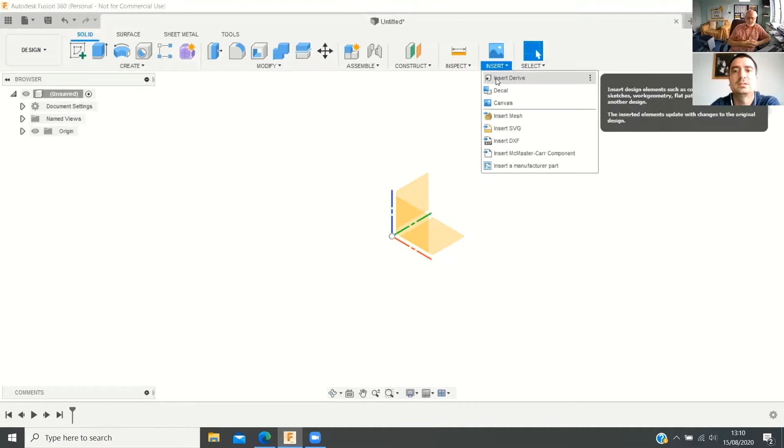Okay, so starting the importing the background image into Fusion. What I'm going to do is come up to the top, go Insert, then Canvas, and insert the canvas from my computer by going into the correct folder and finding the background image that we're going to use.

We're using the plan for the TML boxes. I'm going to insert that onto this first plane here, and as you can see, it's already imported the file there. So then once it's imported, I can go to Canvas over on the side here, edit the canvas, and then calibrate it.

Now, what that enables me to do is to change the size to the correct scale. I'm going to rotate this round. The best thing to do is to take two known dimensions, and then you can just select those points, and that will give you the correct size.

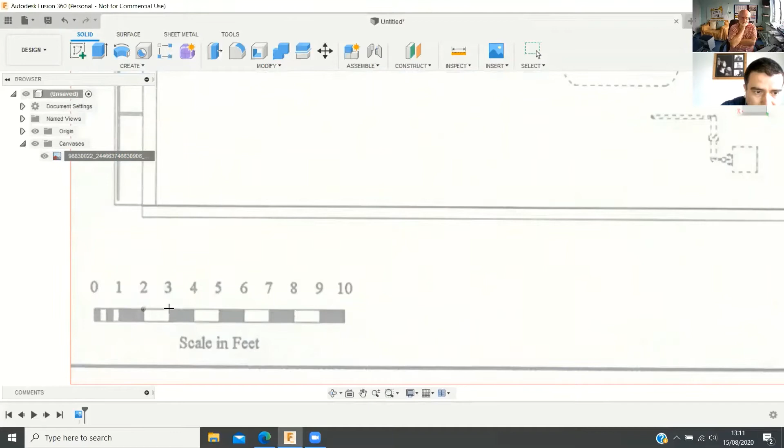So you go to right click over on the image, calibrate. Now on this one it's really good because we've got the scale in feet. So if I just select 2 points that are within the foot dimension and then tell it that should be 2 millimeters, that puts the image file to the correct size for N gauge.

Obviously, if you're doing OO, you do 4 mil. That's now set as an N gauge. You can also do things with right clicking and doing this.

Edit canvas. You can rotate the image slightly if you need to, so you can get it at the correct angle. You can also, using these arrows, move the image around so you've got it at the correct position where you want it. Once you've done the first side, just click OK, zoom back out with the rotation tool.

Then I'll insert the second canvas, which is the same image, but what I'm going to need it for is the end-on view. Selecting the side plane this time.

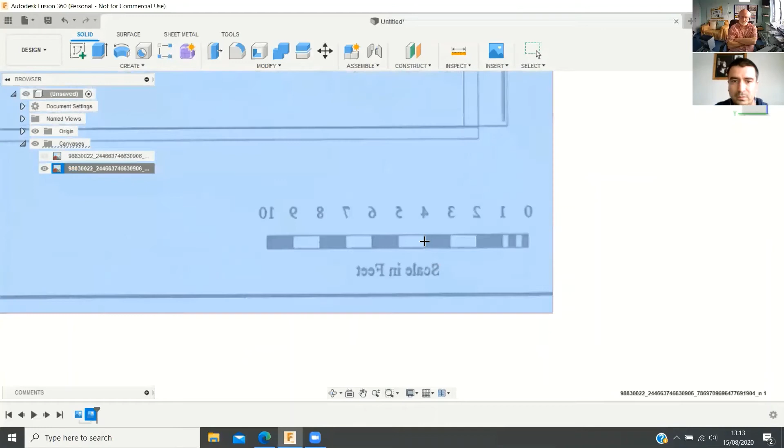I can hide the image that I don't need using the little eyeball key here. Zoom in on that image, do the same again, calibrate, taking 2 known points, telling it it's 2 millimeters, and again that's now set to the correct size.

So over here in the canvas, you can see where the mouse is, there's like a little eye button. If you click on that, you can make them visible or invisible. You can do the same when we start to draw the actual wagon itself.

Okay, so I'm going to start on that plane there. Come round so I'm side on.

So the first thing I'm going to do is, within the printer itself, when you print anything, it's got to be supported to the print build plate. Unfortunately, when you do that, you end up with all these little marks on the surface where the supports connect to the surface. So to get around that, you either want to print with all those supports on the bottom where they're not going to be seen, or on a surface where they can easily be filed off.

Also, when you're printing hoppers, because we're printing with a resin, it's got a liquid in there, you end up with a typical glass upside down and water situation, you get a vacuum. So you can't really print too well with a hopper without getting lines on it.

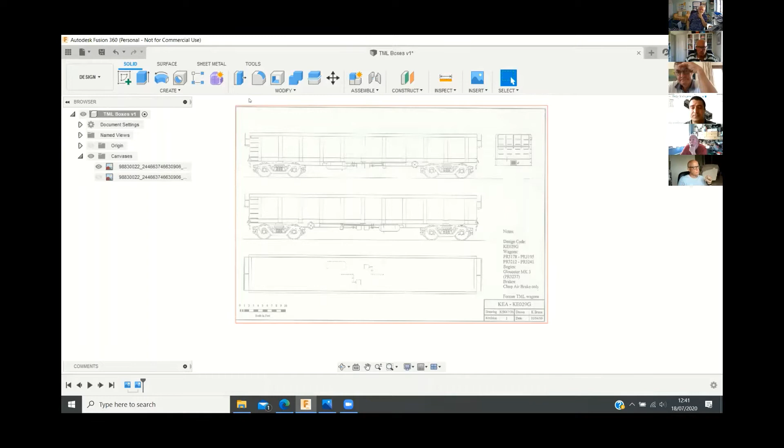So the best thing I can do with the hopper when I print it is to actually print it in 2 parts. The top part is going to go obviously from the top down to this line here, and then the bottom part will be there downwards.

That then gives me a flat surface that I can turn upside down and then file flat once I've printed it, for the supports on both internal sides, so they won't be seen once it's finished.

Okay, so what I'm going to do then is create a new component which will then become the top half of the body, and then I can rename it.

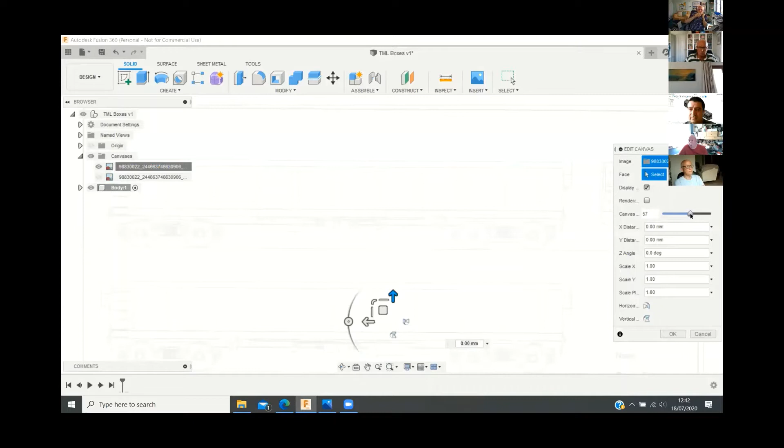As body. You can still just about see the canvas, but because I'm now working on a different component, that becomes a little bit more transparent and a bit more difficult to see. Hope you can all see it okay. What I can do is edit the canvas, and then on the side over here I can just increase the opacity slightly, which might make it a little bit more visible for you.

It's clear enough for me that I can see it. Okay, so the first thing I'm going to do then is start to draw the body.

So if I come up the top here, create a sketch. When I do that, I'll then go into the sketching process, and once the computer catches up, select the surface, which is going to be the same surface I'm looking at. At the bottom here, this is called the timeline, and everything I do will add something into the timeline. So that's my sketch that I've opened at the bottom.

Going back to the top, I'm going to select to draw a box first of all, a normal 2-point rectangle. I'm going to zoom right in, get it into the corner, so I've now got the box starting in the top corner. Let's zoom out, across the other side of the wagon. I'm using my roller ball on the mouse to move in and out, and then going down again to the bottom corner there.

So you can see now the outline is blue. When it's blue, what that means is it's undefined. Whenever you do a drawing, you want it to be defined so that any changes you make are editable later on within the software. If you leave it undefined, what you can end up finding...

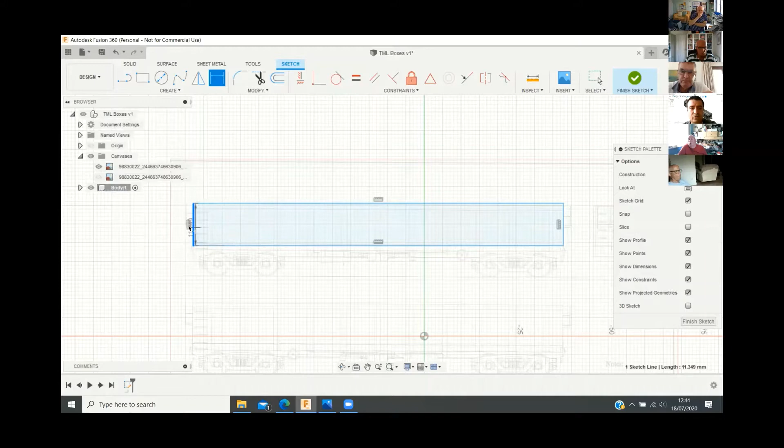So to turn this from an undefined box with blue outlines to a defined box, I'm going to use a hotkey, D on my keyboard. What that allows me to do is dimensionize it. So now I can give it a dimension. I'm not going to change the dimensions because it's obviously working to the drawing.

Okay, I've come out of the sketch, and now I'm going to extrude it, which allows me to turn this 2D image into a 3D box.

So all I'm going to do is create a small box to start with, give it a 9. I don't really mind what size it is at the moment, because what I now need to do is take the canvas and move it so that box is in line with the end-on view.

So I'm going to edit the canvas, and then these controls in the middle here allow me to move that canvas around. I've got left and right, and then I can angle it if I need to. So it's going to move it across.

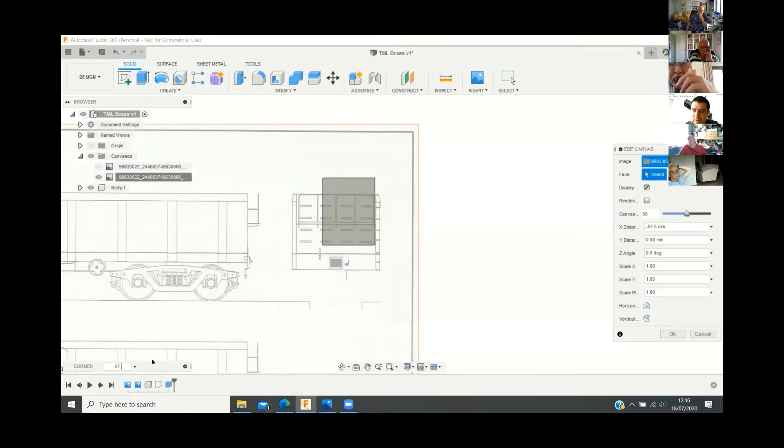Takes a little bit of fiddling to get it where you want it. Okay, so that's side to side, it's probably there or thereabouts. And then up slightly. Okay, so I would say that looks pretty much where I want it to be.

So I'm going to go back to the body, back into the timeline down to the extrude, edit that again, and then I can drag that to the exact width I want. As you can see, it's jumping across in 1mm sections, so all I'm going to do is go into here and use my keyboard to redefine that, to get to exactly where I want it to be.

Okay, so that box now is the exact size of what the hopper will be in the end.

Rather than drawing the whole hopper completely, what I'm now going to do, because the wagon is pretty much symmetrical, is split this into 4, because there's no point drawing it 4 times. I can just split it into 4 and then mirror all the elements across to save myself a lot of work. So to do that, I'm going to go up to this construction part up here and do an offset plane.

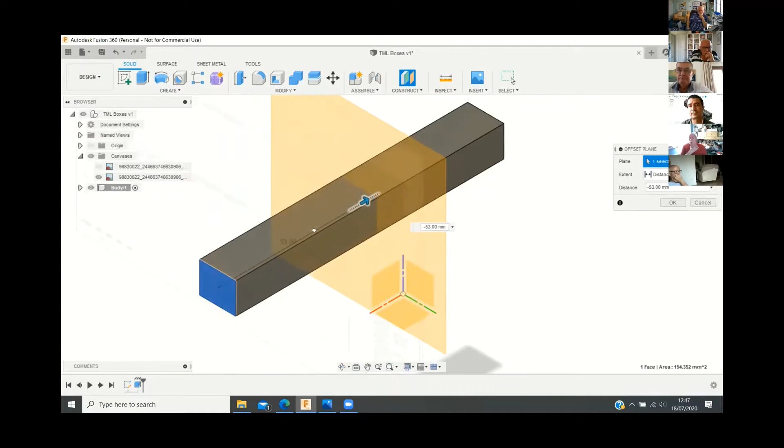What that allows me to do is select the plane, so the planes are the sides. I'm going to select the end one. It gives me this plane here, and then I can move that wherever I want it. What I should have done first of all is taken the measurement: 100.699.

.34. Back to that. Minus 50.34.

So that plane there will now allow me to use this split body function. If I open that up, on the side here I've got body to split, so I'm working on the box there, and the splitting tool is the plane. When I click OK, what it's done - I come down to body over here, this has now created 2 bodies for me. I'm going to get rid of that one, and then hide that construction plane because I'm not going to need that again.

The next thing I'm going to do is measure that 13.36, 6.8. Create a construction plane from that side, and then again split that body using that plane, hide the plane. So going back to there, if I bring that drawing back.

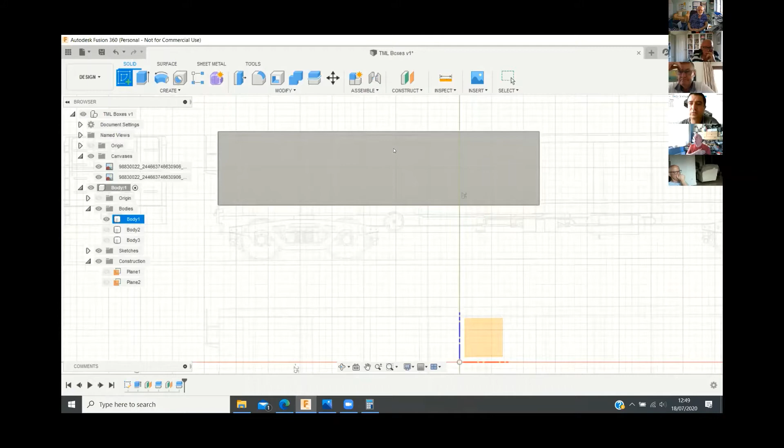Okay, so we've got the drawing to work to now. So what I'm going to do to start off with is this top rail along the top. So go back onto my sketch, select the plane I'm going to work on, which is the side. Again, I'm going to use a rectangle.

There's 2 ways to do this top rail. Looking at the pictures, it's not a rectangular shape - it's got a bit of a diagonal edge to it. So if I go to the pictures and show you that, you can see there's a slight diagonal edge. The top edge is slightly smaller than the bottom one.

So I'm going to draw another rectangular box. Now, you've got these things here called constraints - these are like rules or laws that we can work to. Each of them does a different thing. So one that I can show you quite quickly is a snapping tool.

So that snaps into the corner, so that when I draw this box now, it will always be in that top corner, no matter what I do. Okay, I can then drag it across. I'm going to get it at the right height. Looking at the drawing, it's about there.

Now I'm not going to the end, so that I can show you the next constraint, which is coincidence. So if I click on coincidence and take that top corner of the box I've just drawn and select the top corner of the original box, it will now snap those 2 edges together, so they're now exactly the right size. Again, you can see the bottom edge isn't defined because it's light blue.

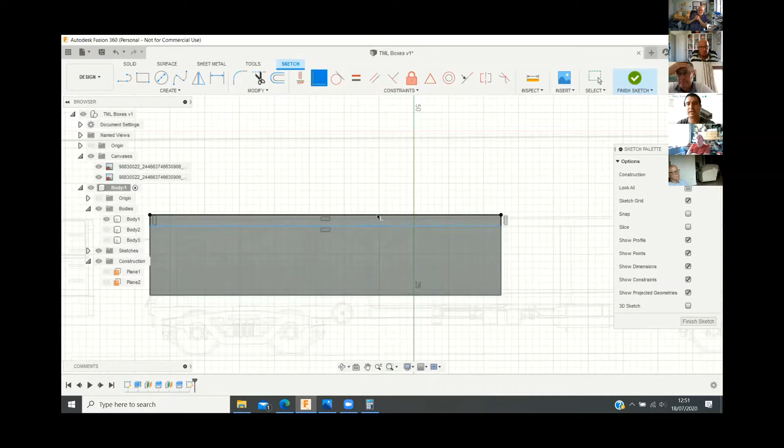So I'm going to go with my hotkeys into dimensions again, select the bottom edge, select the top edge. That then brings my dimensions to the side. Again, I don't need to change that because I'm working to the drawing - it's already predefined. Just select that - that's defined onto there now.

The next thing I'm going to do is extrude that out slightly so that it becomes the right size. Okay, so I'm going to drag that out by 1 millimeter. So I've now got that top edge there. Again, looking at the pictures, I said that that was diagonal.

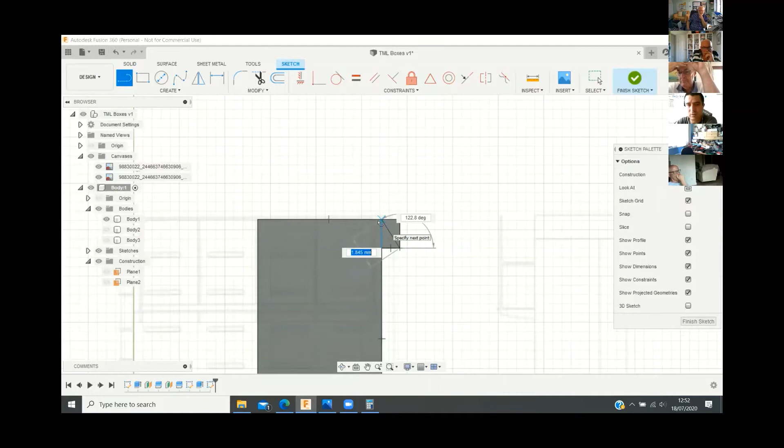So what I'm going to do is go onto the new sketch again on that edge, select the line going from that corner in line with there. So I've come to the bottom here, and now I've got another coincidence. You see how it's putting a blue line just below my mouse cursor? So that's now locked to that edge, so that when I do that, it would automatically be in line. Now, obviously we don't want that to be snapped there, so if I just move across slightly, we've now got a slight diagonal edge.

Again, it's undefined, so to define it, again do my dimension key. Now, the reason it's not defined there is not the length, because it's snapped top and bottom, but it's the angle. So if I click on the line, and then come down to that bottom line, and then come out slightly, it defines my angle. And then if I click enter, it's automatically now defined.

So by now having that line, what that allows me to do is click in that little triangle that's left, right click, extrude. If I zoom back out and spin it round, I can then extrude that diagonal off. You can see it cuts there. And went the other way, add it on and join it.

Now with the extrusion to cut, I can do one of two things. I can drag it all the way across to the middle of nowhere - the problem with that is if you then go back and add anything there, it will automatically cut it out afterwards. You can define the length by just typing in the length you want over here. Or if I spin the drawing round, like those drawings there, I can then click on this edge and it will define the length of it to that edge. So if I now change this plane on the end, it will automatically bring that cut with it.

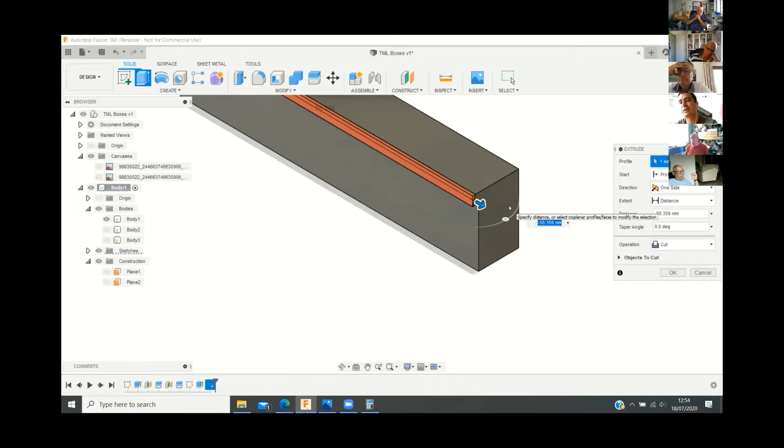You can see how it's left a tiny little bit on the end here, so I'm going to go back into edit feature and just drag it that little bit extra to cut it off.

If I go back into the drawings, if I find the drawing picture, it shows a close up of that top rail. I don't know if you can see it particularly well, but the bottom corner is curved slightly.

So I'm going to add that curve in by selecting that edge, just clicking on it, and then doing a fillet at the top here. What that does is basically puts a curve into the edge. So I can drag this arrow in slightly, and you see it curves it in.

Now we haven't got a defined size, so I'm just going to go with one that looks about right, probably 0.3 I would say. And the top edge was exactly the same, I'm going to put a slight curve onto that, again going for a similar sort of size just to make it look reasonable.

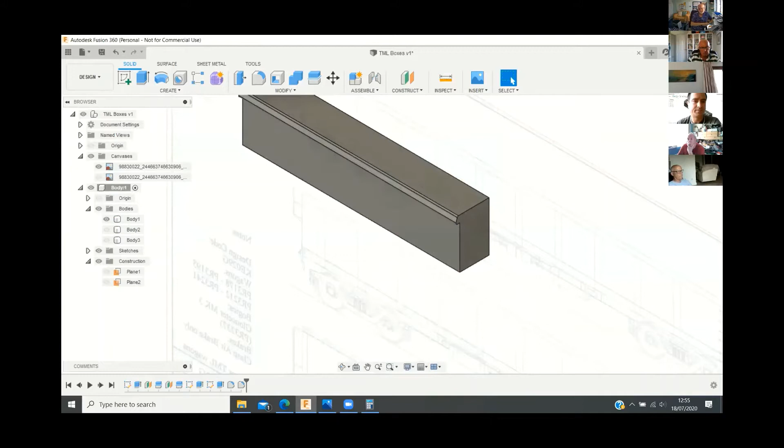Okay, so the next thing I'm going to work on is I'm going to put in the ribs. Now again, going back to what I was saying, I want to make my life easy. I don't want to draw every individual single rib. What I want to do is draw it once and then have it copied across.

So what I'm going to do is, the ribs on the side don't go all the way to the edge of the bottom, they're slightly indented. So I'm going to find out by clicking on this edge at the top here the length of that edge, because it says at the bottom it's now 0.6 millimeters. So I'm going to bring those ribs out so they're 0.6 millimeters level with the bottom of this line.

So zooming in, again, create a sketch at the top, select the plane, and a rectangle. So again, I'm going to lock into the bottom, drag across, it's the right width, which is about that far, and all the way up to the top.

And then I'm going to define it again. So D on the short pad, click that line at the bottom, D again, and do the same. Now that's come up with adding this dimension is going to over constrain it. So essentially what's happened is automatically it's decided, when I clicked the box and drew it from the bottom to the top, that it's defined the height automatically by itself on the constraint.

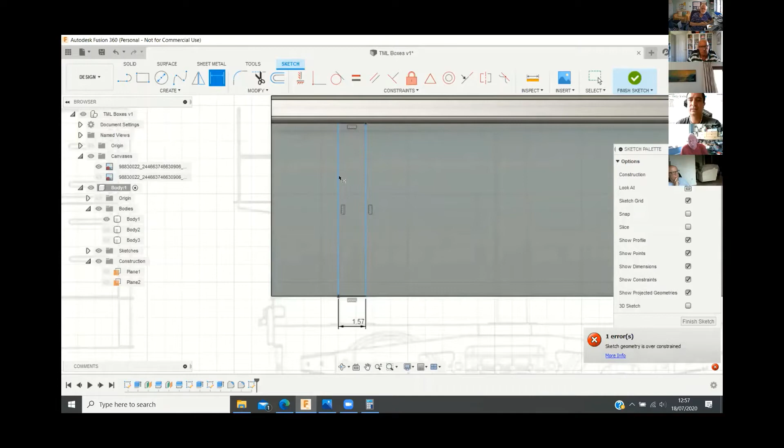So the only dimension that's not constrained then is its position left and right. So if I click on that line there, go to the end, once I do that, I've now got a defined distance from the end of the wagon to the start of the rib.

Again, if I go over the rib, it highlights a different color. Do right click, extrude, I'm going to spin this round so you can see what happens. So you've got the arrow on the side here. Because it's sticking out, I want to come outwards with it, so it's a positive number, not a negative. If I was doing a negative number, it would cut into the wagon. So I'm going to come out by 0.6 millimeters, which brings it in line with the bottom of the curve on the top rail. That's now defined.

Again, looking at the pictures, they're not particularly curved on the outside, so I'm going to leave it with a rectangle. But as we can see, there is 1, 2, 3, 4, 4.5 ribs along this side.

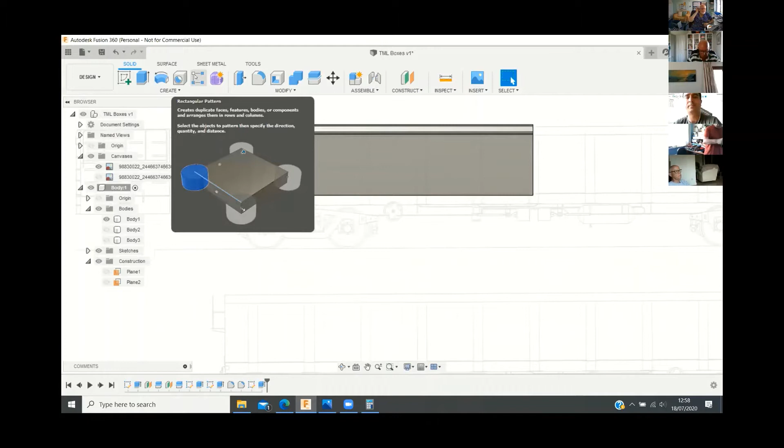So if I come up to the top, rather than drawing each one, I come up to the top, I've got a rectangular pattern up here. I click on that, come over to the side, I've got pattern type. Now what I want to do is the whole of that rib, so I've got to change the pattern type from faces to features.

And then it gives me an option of selecting the object. So coming down into my history at the bottom of the timeline, what I do is I select that extrusion that I've just done. That then picks up that rib. Direction that I want to do, so select the direction and I click the bottom edge of the wagon. So it now knows it's got to pattern it left and right on that wagon. So we know that there's 1, 2, 3, 4, 5 ribs that I've got to add, plus the one that I've already got.

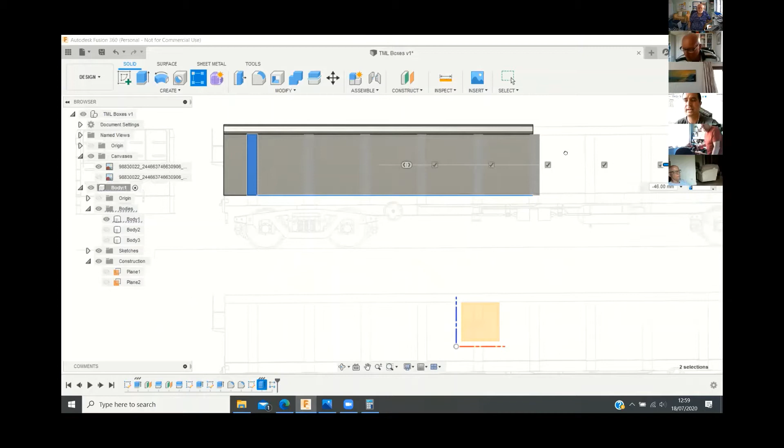So I've got to change the quantity to 6, and then I can drag it across, and you can just about see as I come across, it's adding in all the extra ribs. Now if I just drag it across so they all line up where they should be, click enter, all those ribs are now drawn, nice and easy.

What we've got though is this one on the end is hanging off. So I'm just going to get rid of half of it by spinning the model round, clicking on the back edge, extruding, dragging it out because I know that I'm not going to draw anything on that edge, and that automatically deletes that extra bit that was there.

So I've now got the 4.5 ribs. I've noticed that slightly different size, half of the normal rib in that one. So what I'm going to do is check the width. That's 1.57. That's 0.49.

Calculator. Yeah, 1.57 divided by 2 and minus 0.49. So what I'm going to do then is spin the model around slightly on the edge. If I click on this whole side now, I'm going to extrude that just to make them even by 0.295. So that should now be 50% of that.

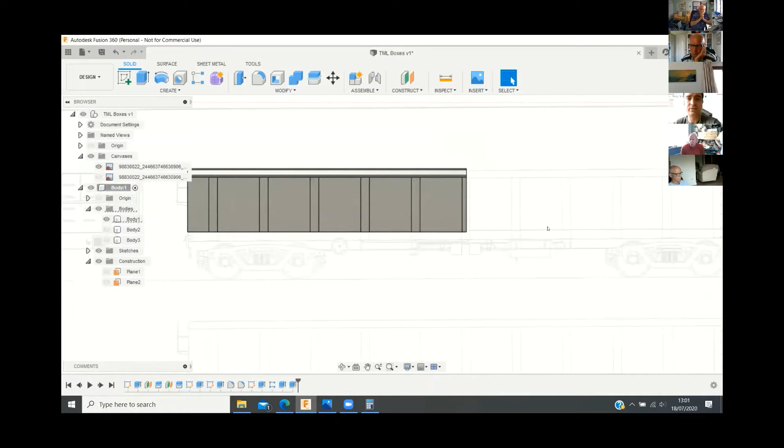Okay, so that's all the ribs done on the side, top rail done. So I'm now going to spin this round and work on the end of the wagon. So looking on the end, we've got all these little indentations in the side. I'm going to use a similar technique to draw those as what I was drawing with the ribs.

I'm going to come onto the side, bring in my drawing. Again, you can just about see the indentations on the drawing. Create a sketch onto the side, zoom right in, 2-point rectangular box, click top corner, bottom corner, 3. I'm going to go 2 mil because it's close enough.

So again, I've defined the sides and the top, but it hasn't got a defined position, it's just floating there. So I can define the top by clicking top edge to top of the wagon. That's now the height defined, and then the side edge to the side of the wagon, and that's the width defined. So that's now stuck in that position there.

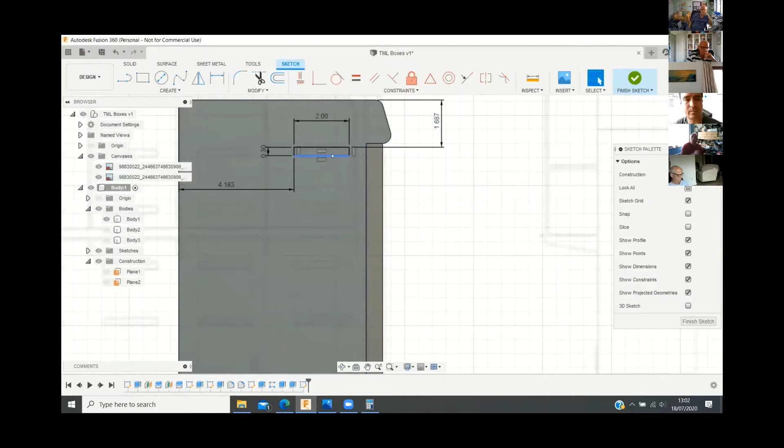If I go internally onto the box I've just drawn, do an extrusion, because it's an indentation now, it's going to be a minus number. Now, looking on the side of the wagon, it doesn't particularly go in far, but the printer can't give me an indentation that's too small because it just gets flooded with resin. So I'm going to define that indentation as minus 0.25 millimeters, and then the resin should flow back out of that as it prints.

So I've got one of them now, and I noticed on the picture that there's 4 up and 4 across. Because I'm only doing half the wagon, I'm going to do the 4 up and 2 across.

So again, going back to my rectangular pattern, select that, and then select features at the top here, selecting the extrusion that I've just done, the direction that I want to do it. So I'm going to go downwards, drag that arrow down slightly so that it's already working in the downwards direction, and there was 4 of them.

Spin that side on, and I'm going to drag these down so the bottom one's in line, and you can see they've all now gone in exactly the right position. What I can then also do is a sideways one, and just drag that arrow across. Now there's only 2 of them. Change that number to 2 and drag those so they're in line. So I've now got my 4 extrusions on the end in 2 rows and all the ribs.

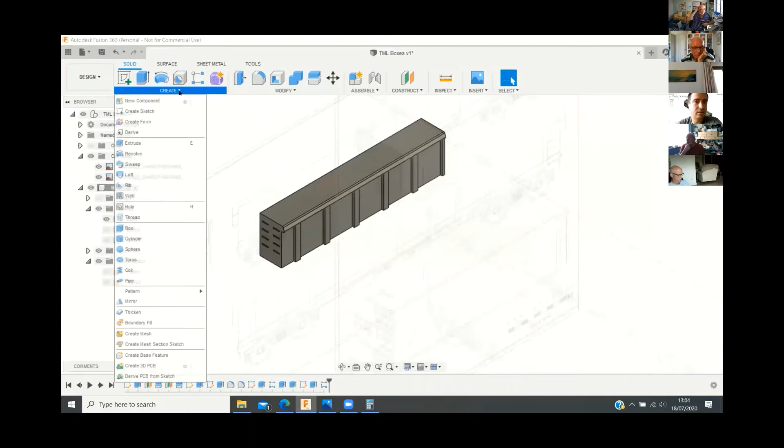So if I zoom that back out a little bit, I come up to the top here, and under the Create banner, scroll down to Mirror, change it from faces to bodies, select the body that I want to mirror and the side that I want to mirror it on. So I'm going to spin that round, selecting that side. I've now got my 2 quarters there.

I'm going to then combine those together at the top here. So selecting combine. It's got target body and tools body. So I'm going to use target body as body number 1 so that it doesn't start changing all the bodies. If I start with target body 4, then everything from then on would be named body 4. So if I select target 1, tools body is body 4, and then join, I've now got half of the hopper essentially.

So now that I've got to this point here, I'm going to file, save that, and then file, save as Foster Yeoman boxes.

In the TML box, Carl asks: is it not possible to define the ladders as a separate part that you show or hide as part of the model with Fusion, so you don't have to have two different files? I could draw them as a separate part, but because I want to print it all as one part, every time I wanted to print it I'd have to go into the software and join them together.

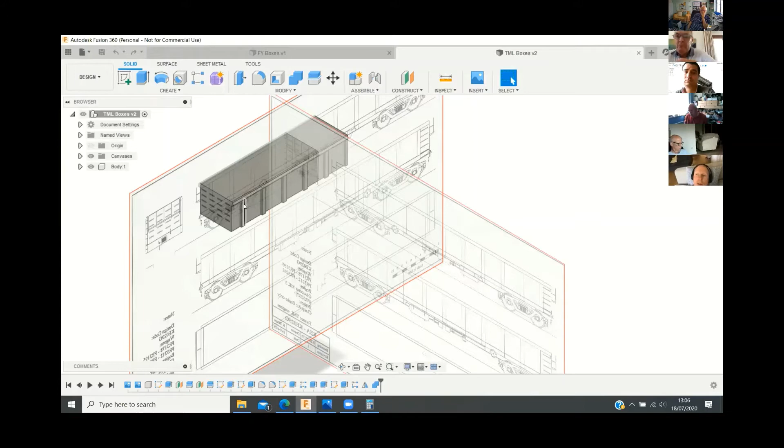Yeah, it's an alternate way. Yeah, definitely, it's a different way of doing it. Yeah, it's a viable way of doing it.

So I'm going to go on to the end here and then draw the railings. None of the pictures I had showed particularly well whether it was a flat floor or a mesh, so I'm going to just draw it as a flat floor because I think that's going to be easiest for the printer.

So the first thing I'm going to do is select its height. Now it was roughly halfway between the middle two boxes.

Again, create a sketch, select the side, create a 2-point rectangle, bottom corner, that side.

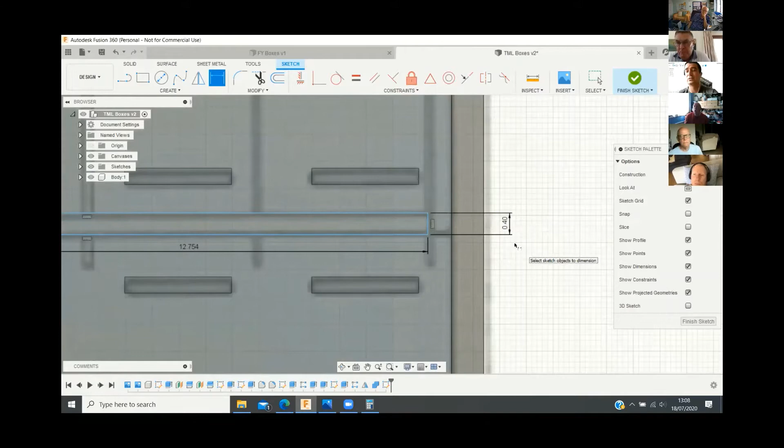Define the length, define the height. So the height here is only 0.28 millimeters. Now, knowing what the printer's like, that would be very, very flimsy and it wouldn't particularly print well, so I'm just going to increase it slightly and take the hit on realism to 0.4 millimeters so that I know it's going to stay there, and when I print it, it will print well.

Again, define the height. I'm going to round that to 4.5 to keep it easy. So the length is 12.75. I'm going to redefine that, get rid of that 4 so that it's again easy.

Then I need to make sure that it's centered. So I'm going to work out what the width of the bottom of the wagon is, was 13.6, minus 12.75, which is 0.425. So from the side of the box I've just drawn to the side of the wagon needs to be 0.425, and that's now centered and defined.

Again, if I go in, right click on the box, extrude, spin the wagon round, I can now drag it out to the length on the drawing.

Okay, now for some reason we have a different height there.

Carl asks: if you wanted a mesh floor, could you just do the supports on the floor and just leave those, or would they be different? Yeah, that's possible.

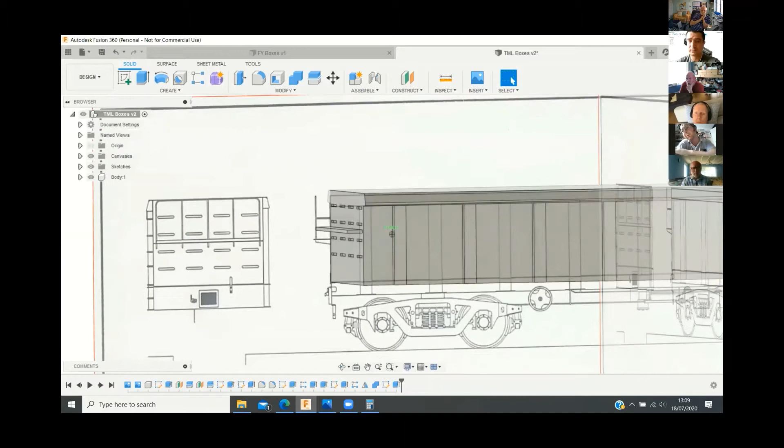Okay, so now having done the extrusion outwards, it's got a little triangular bit underneath here.

So what I'm going to do is draw on that bottom edge. In fact, scrap that, undo that. I'm actually going to draw on the side edge, and I'm going to use line to draw this because it comes down slightly and then diagonals in.

Now you can see how it's not snapping to the side of the box for me, so what I'm going to do is leave it floating out here in mid-space. Go back up to the coincident constraint, tell it to click to that line. Now again, that's clicked to that line, but it's floating.

Okay, so I can define the height that I want it to be, that there. Click on the dot there, and then the corner of that, and then I'm going to tell it it's 0.5. Now it's fully defined there, and now it's fully defined.

Click on the inside of the drawing, extrude, spin the view to the bottom slightly, and I'm going to just bring it in.

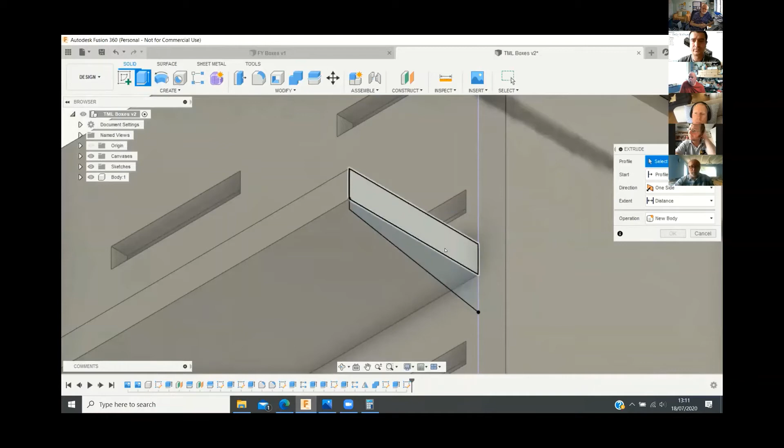Bring it in by 0.3. And I've got to do exactly the same there on the other side. So go into the history, I'm just going to edit sketch, make a note of the dimensions, which is 0.9.

Finish that sketch, go back out, spin across to the other side. I'm going to hide the canvas because it's now in my way. Then draw on that edge, and click on the line.

You can see how I've got the other side in there. What I could do is draw down slightly and then coincidence that corner. Now the line's going to be identical on both sides. Then draw another line from there inwards, and then use coincidence constraint.

Click there, getting right into that corner. Now, again, that's drawn in coincidence. If I extrude again.

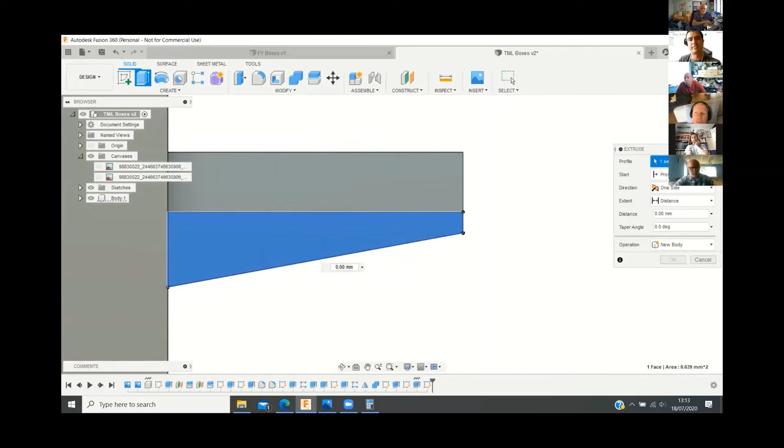Right, it's not doing that now because that line hasn't got a line from there to the top there. So if I just draw another line in, I've now got that fully defined. It'll allow me to extrude that inwards by 0.3.

What's that chat that just popped up? Who has the music? Not guilty.

So the next thing I'm going to want to do is add in the railings. So they look like they go probably level with the height of the hopper, looking at that. So I'm going to draw those by first of all creating an offset plane.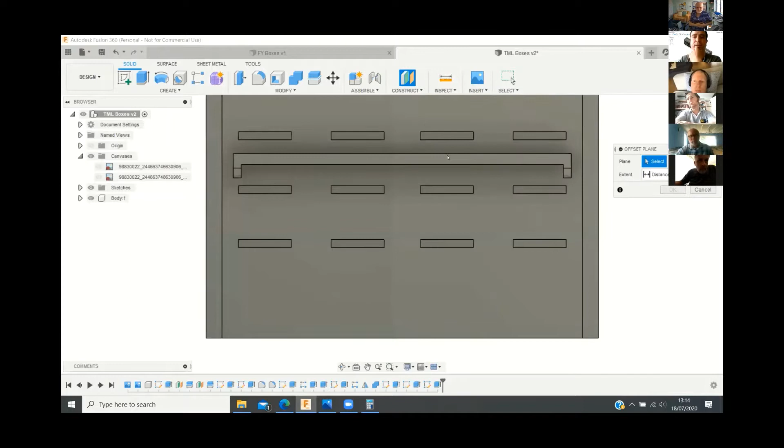Click on construction, offset, and it's going to be offset from the edge of the hopper, edge of the landing there. So I'll now select that edge, I'm going to offset it slightly, and I'm going to bring it in by minus 0.3.

Okay, so the next thing I'm going to do is I'm going to draw the railings themselves. So I'm going to sketch on that offset plane. Try again.

If you can hear someone talking, you might remember a kid in the background, he's playing the Xbox.

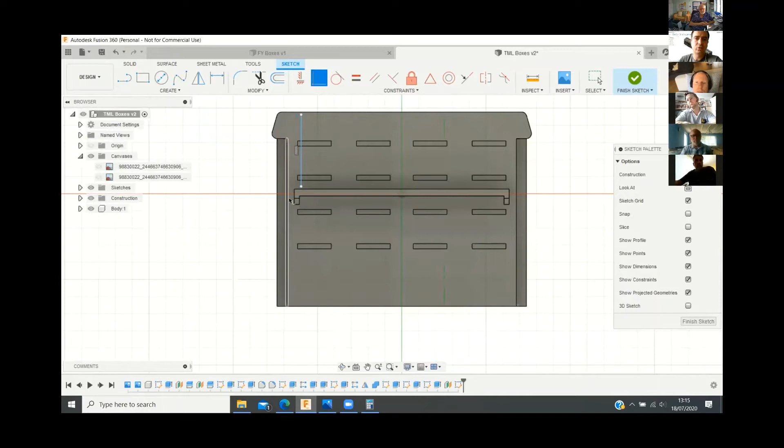Okay, so I'm going to draw a line. Again, it won't snap to the edge there because it's an undefined edge. I'm going to draw a line upwards, and I'm going to draw coincidence to that edge, a coincidence to the top edge.

And then need to define its distance from the edge inwards, 0.4. I'll do the same on the other side. Now it will snap there because it's got this purple line that goes across, and that's because I put that coincidence in there. So I'm going to draw a line up, define from the edge to the line, it's 0.4, the same as the other side.

I'm going to draw a line across the top. So I've now got the outside edges. If I then go fillet and do, I can either select the two edges, or you can see as I'm moving my mouse around, it will put that red line in. So I've just clicked the two edges. I've now got that fillet in the corner.

It's not a particularly sharp bend, so I'm just going to define it as 0.5 millimeters. Maybe a bit more than that actually, 0.7. It's now put a radius in there at the top there.

I'm going to do the same on the other side. So I'm going to do there to there, and then 0.7. So that now is the outside edge of the railing drawn.

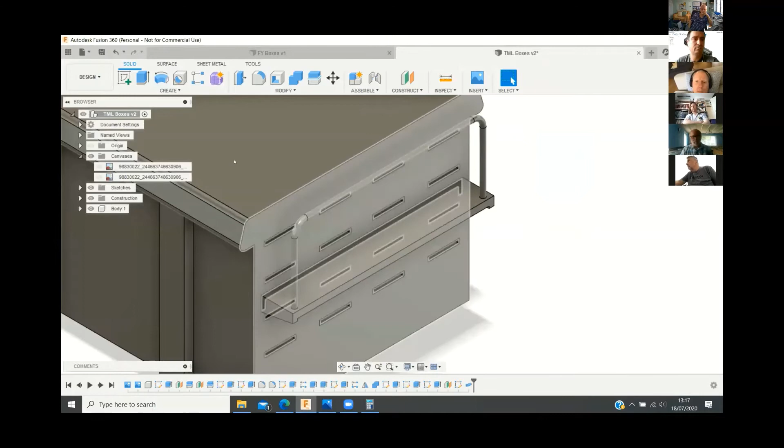Let me just have a quick look. How many should there be? 2 upright. 3 uprights, so I need to have 1 in the centre. So...

What I'll do is go - I can either create a new sketch and then draw those individually, or I can go back to my timeline at the bottom, right click on it, edit sketch, and I can go back in there and do an extra bit onto that drawing. If I draw a line again, if I put the cursor on this top edge, as I drag it across, it will snap to a triangle when I'm in the middle, and I can draw directly down to the bottom edge, and I've now got the centre line.

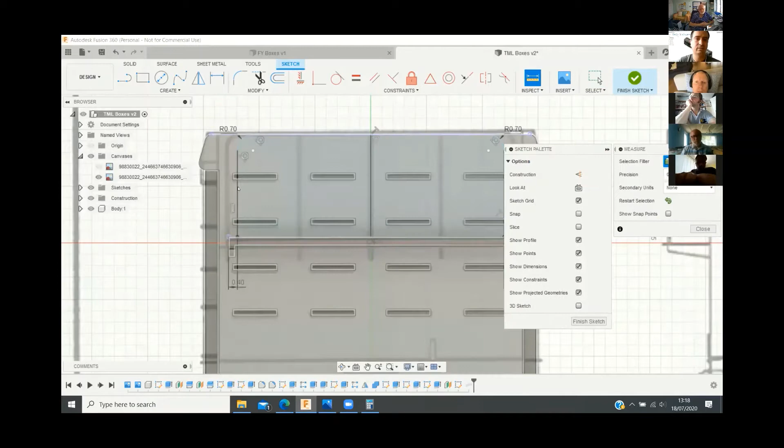I'll go to do the same again, cross. Won't find the middle there. So it's not able to find the middle there. So what I'll do is I'll inspect it, that edge to that edge, and that's defined as 5.975 mil.

Draw the line, and then dimension from the line to the middle, which was 2.9875. Same on this side.

When I finish the sketch, it won't automatically put the pipe in, so I've got to go back again to pipe. I'll bring up the sketch I've been working on, and to define it I'm using control to select, but it won't select each one, so I'll just draw each one individually. At the moment it's trying to cut up into this top rail, but if I change from cut to join, it will automatically join the pipe in, and that one's complete. Do the same on the next two.

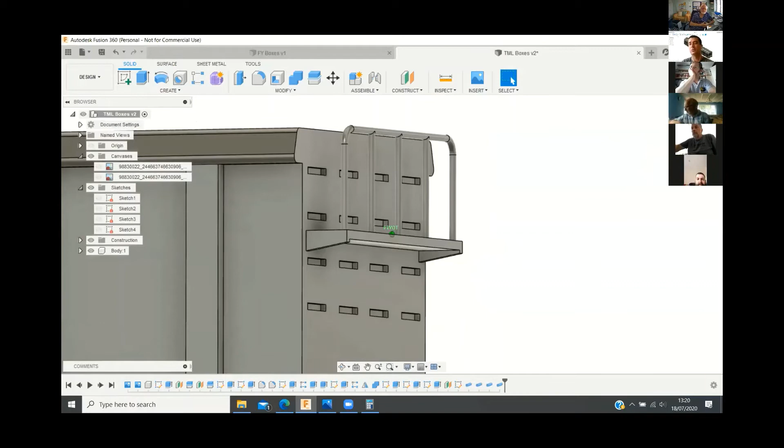Then we'll turn that sketch back off, because otherwise you'll see the lines and purple markings for everything else I do, and get rid of the background. You can now see the railings are drawn in. How well those railings will print, I'm not entirely sure, as I've never tried printing that thin and that high before. It's 0.3 millimeters. You might find it'll either wobble or just not print at all, but I'll give it a go and see what happens.

So go back to the picture. I think that's pretty much the top half of the hopper complete. There's ladders on the side too, but I don't want to do that initially.

Chat - is the PR? Yes. Number range was 3178 to 3195. Okay.

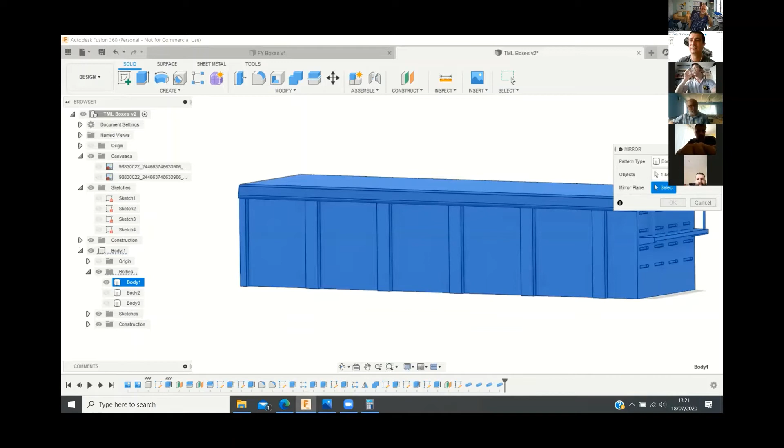What I don't have then is the hopper part. I've got two ways of doing this - I can either use the shelling tool, click at the top edge, and tell it the inside thickness to be whatever dimension you want. I'll go 1 millimeter. It's not liking 1 millimeter, it says. There we go - it's not liking it because, you can see the blue wrapped around the side, it's trying to use the whole edge.

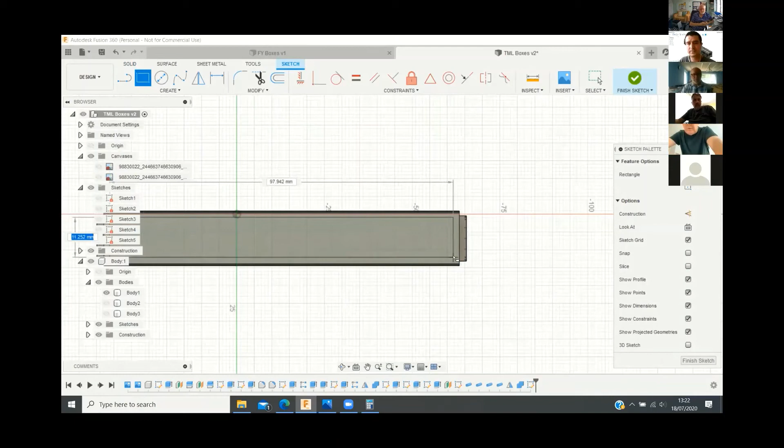So the next best option would be to draw it in myself, using the rectangle - from there to there - and then define the size of that rectangle, from the side to there: 1 millimeter, edge, edge, 1 millimeter, 1 millimeter. Now I've got the hopper drawn, extrude that.

Carl, is that the normal wall thickness you use, 1 millimeter? No, it varies really - you can use anything you want. I'd say probably the minimum you'd want to go down to is 0.4. For the EMUs I was showing last night, I'm using 1 millimeter because I want the strength on them, but for this I could probably take it down comfortably to about 0.6.

So now you can see from what I did there, I've got the hopper part done as well. Any questions at that point?

Yeah, I've got a question, Carl. I don't use Fusion. Hello, who is it? Where are you, Gary? You? Gary. Hello, Gary. Hi. Yeah, I can't think what I use at the moment, but I find it doesn't work as accurate as Autodesk Fusion, so I draw things 10 times larger and scale them in the slicing software, and I get a much better result. Okay, but I think that's just a problem with the software I'm using. I think Fusion will go down finer.

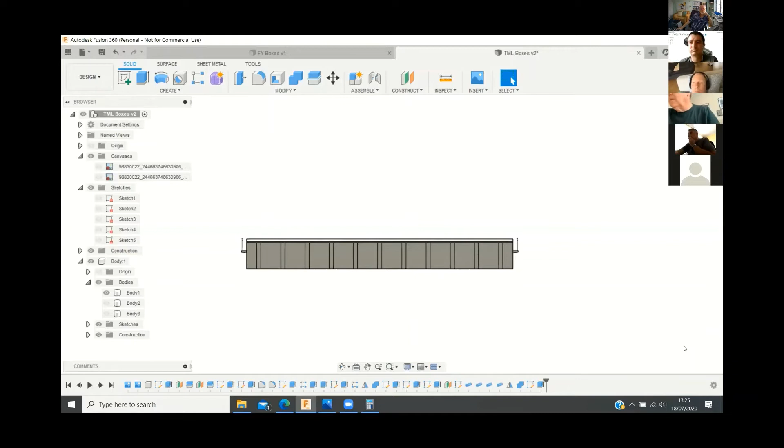Any other questions? Okay, right, so just quickly Carl - when you did the handrails on the back, you didn't start from the plan, did you? No, because I noticed there's a good reason for that. What I noticed is that if I bring the plan back up, the plan's at a slight diagonal - you see how it's sitting slightly low here? But on this edge, it's sitting at the right height.

The indentations are as per the plan. If you look at the picture of the wagon, the railings are sitting halfway between the middle two indentations. So I've drawn the railings halfway between those middle two indentations. So either the end-on view of the plan is incorrect, or the side-on view of the plan is incorrect. Which one it is, at the moment, I don't know.

Well, you're running into parallax issues. What's parallax? Unless where you're doing your measurements from is actually level with the plane of the drawing... you know how when you look at something top down - if I understand what you're getting at, it's like you're looking top down at an empty tin can, and you can see the bottom of the tin can is a smaller circle inside the ring of the tin can, even though you know that the bottom of the tin can is the same diameter as the top.

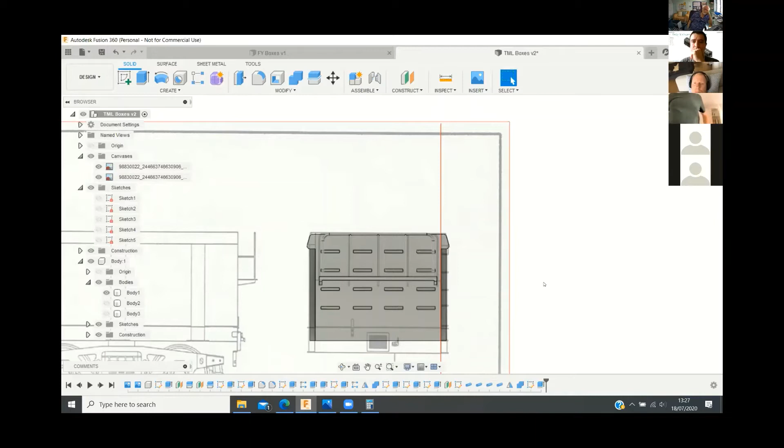So sometimes you get that when you're working from a drawing, if you're doing detail work and the plane of the drawing that you're working from is below the face that you're actually putting the detail into, you run into that kind of issue. It's not necessarily the right term, but things appear to be the right size, but when you actually move the face you're working on to be level with the plane the drawing is on, you find that it's possibly slightly out a little bit.

I've found similar kind of problems to what you run into there, Carl, but it's normally from scanning. When you scan something, the scanner's not quite right, and you get those kind of alignment issues. Like it looks like the scan's rotated by a fraction of a degree, so at one end it's not the same. What I can then do is go into the canvas, edit it, and rotate it - it's going to be a minuscule amount, like a quarter of a degree or something ridiculous.

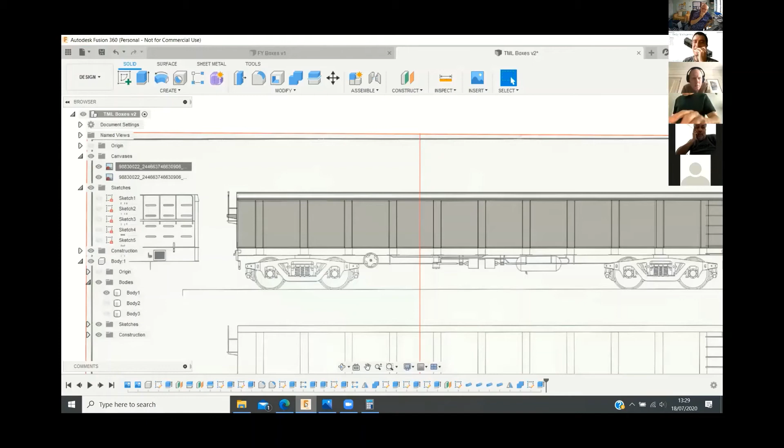Carl, can you bring up the picture you've got of the end again, please? I want to have a look at something on your picture. If you notice, the indentations on the prototype wagon start lower than the top side rail. On yours, and on the plan, they start literally at the bottom of the top side rail, which is why your walkway is a bit higher than on the plan. What we can then do is go back in the timeline.

Can I just say something, Carl? I know these were batch wagons. I don't know if there's any differences - there's a lot of different detail differences between different batches of these, isn't there? So it could be that, couldn't it, Paul? Yeah, I'm just saying it's quite a complicated thing, these batches of wagons.

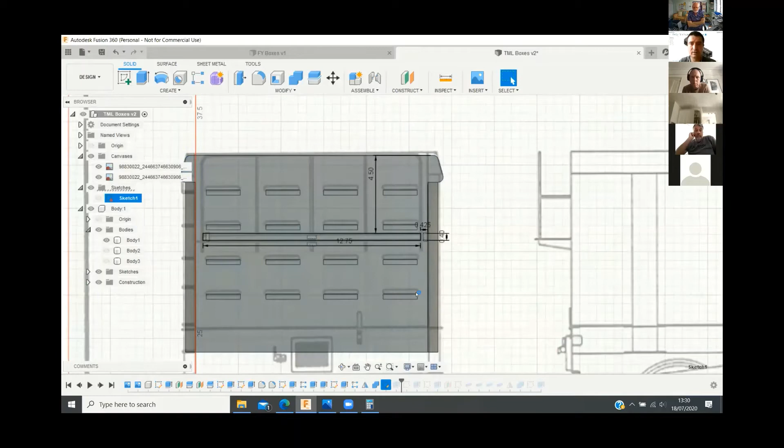This wasn't it. So what I've done here at the bottom is I've rolled back through my timeline, back to the point where I initially put this first indentation in. Go back into the sketch, I can just redefine that, move that down slightly. Then when I come back through, finish the sketch off there, what that'll do is move all those indentations down according to the plan, and then I can redefine the height of that, bring that down to 4.5. That's very, very neat.

And that's moved - it's still not matching perfectly, but it's down to match the rest of it. And I can just flip back through the timeline. Keep going down, Carl, until it gets lined up like a photo. Yeah, I could do that.

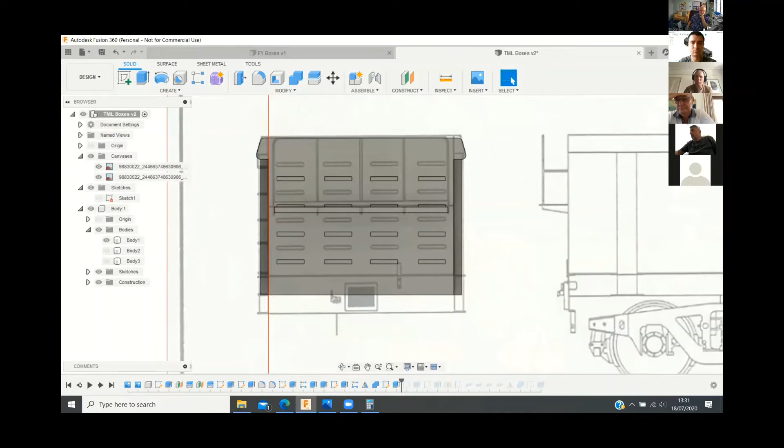Now you can see there you go - an issue that you then encounter when you start doing things like this is one change you can make then has a knock-on effect on everything else, and you end up with silly little things happening like that. You see how the line that I drew, which gave me the down angle, is now creating an up angle.

So I've got to go back into that drawing, edit the sketch, get rid of the coincidences, get rid of the line, get rid of that line.

How do you work if you don't have a drawing? With great difficulty, is a short answer. You could work from photos. Are you normally working from drawing? Yes, yeah.

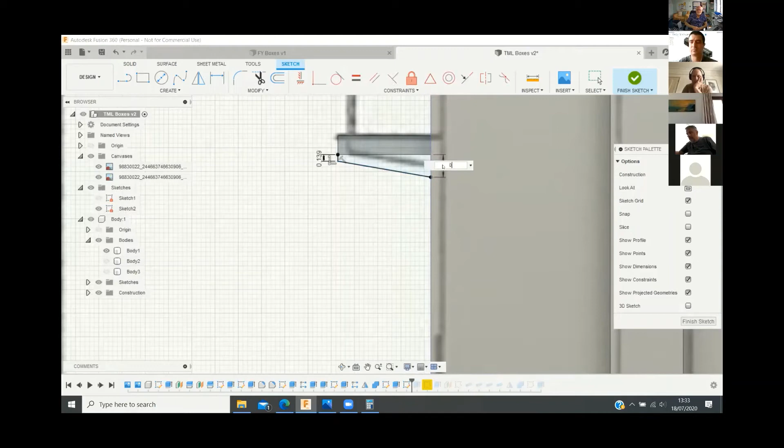I take it if you didn't have a drawing, you'd have to draw your own sketch perhaps to work from first. Yeah, you could do that. I've worked from photos before. When I did the EPBs, they were done from photos.

If you know a dimension on a photograph, it's possible to calculate the rest of the dimensions. It's not something I know how to do, but I know my son does it - he does graphic design. I try and square up photographs and get them on known dimensions, but apparently if you know one dimension, you can work out any dimension you require, irrespective of the angle. I don't know how you do it, but it is possible. I've got no idea either.

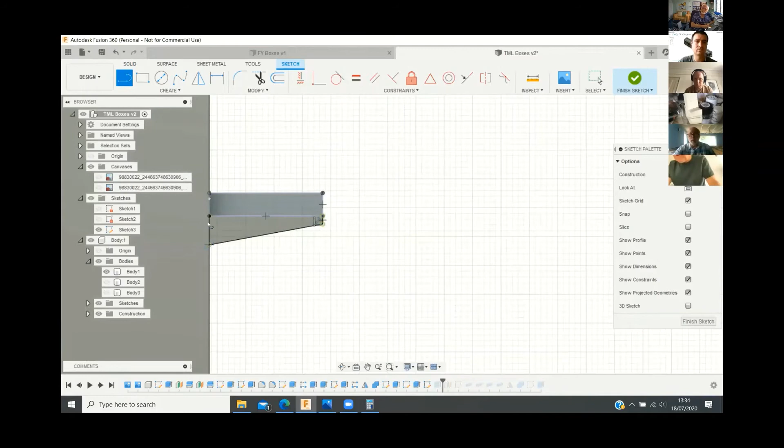I use a program called GIMP, which takes out the perspective of photographs. If I'm trying to do a coach I can't get a drawing of, I'll find two photographs taken from each end, put them in GIMP, draw around each photo, overlay them, and make any adjustments needed. Some of the stuff I've drawn, when I've eventually got hold of a drawing, I'm pretty damn close. So it's worth looking at GIMP. How's that spelt? GIMP.

G-I-M-P. Oh, is it as in GIMP mask? I don't know how I know that. Yeah. Can I butt in?

Dave Smith. I'm not sure what you did with EPBs working from photos, but a lot of people don't know I've measured a lot of EMUs and also photographed the roofs and the underframes and measured the underframes. So if someone's doing anything on those, I may have the item you need. That could be useful to go back into to do more detail on. Anyone's welcome to ask, of course.

Thank you. Okay, so now looking at that, now that we've done all those changes, that's pretty much where it should be.

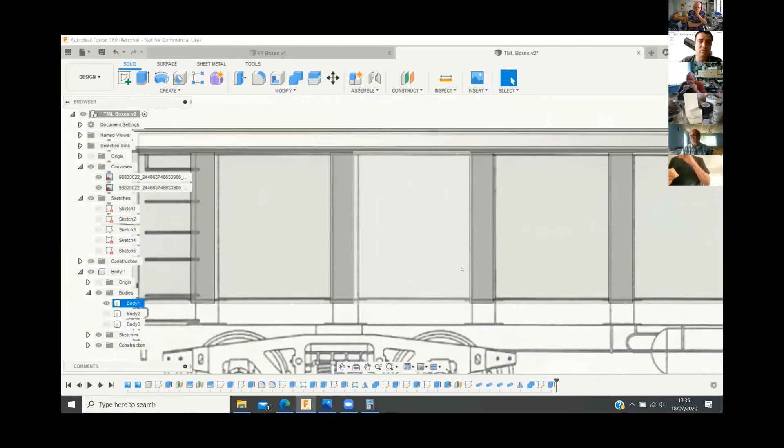The last thing I'm going to do here is the handrails. The problem with handrails on the printers is you don't get them particularly fine, especially if you're printing horizontally. What I did when I printed the FYs was just print small rectangles to give the impression of them. I'm going to leave them off here for the moment, and potentially add them in later if I wanted to.

I'm going to jump ahead and say that's roughly complete, so what I'll work on next is the underframe. Again, I'm going to create a new component and rename that - I thought Phil calls that the chassis. Chassis, spelt weird, yeah? Bollocks.

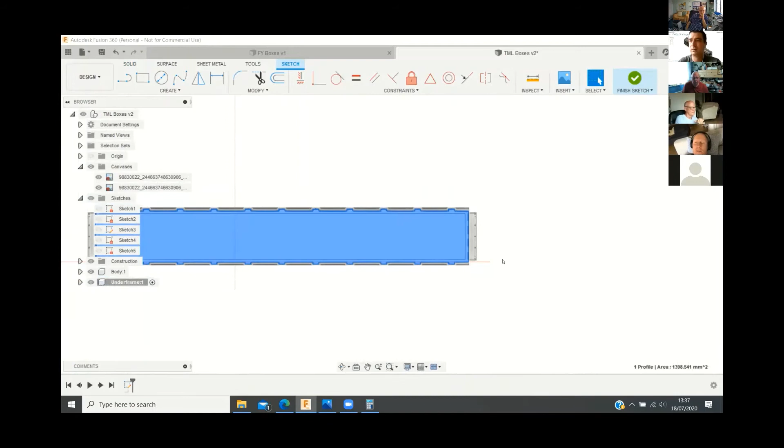Okay, so again drawing it, I'm going to use the bottom profile of the hopper, and you can see how it's now drawn all the ribs on as well. For the underframe part, I need those ribs on, so I just extrude that down to match. Okay, so that's the bottom part of the hopper drawn. There's like a rib that goes around the ribs themselves, just to give an outline detail.

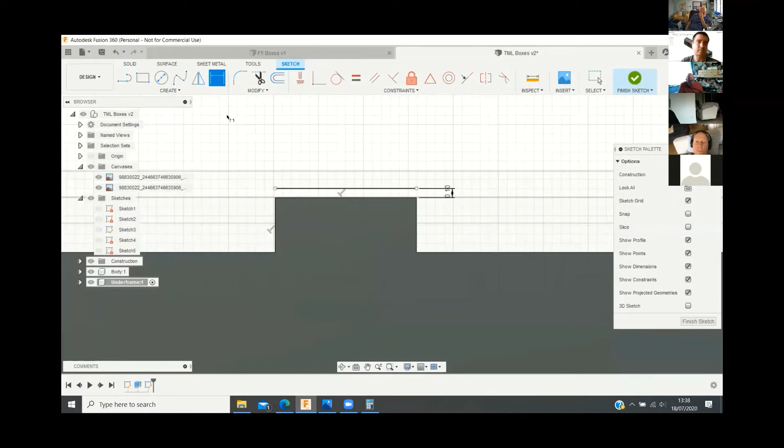To draw that, you can use a similar process to what I did for patterning. So I draw a sketch on that plane and use the line tool. I want to go from that edge, select the corner, slightly out, go to that corner, and define the distance from there to the edge of the rib as 0.1 millimeters. Then I can draw a triangular shape. I'm going to define the angle as 112 degrees, lock that in at the bottom, same on this side - 112. You see this one won't lock - there it is, locked in.

Okay, so now I'm going to select what I've just drawn, extrude, and give it a thickness of 0.2. So I've now got that rib shape there.

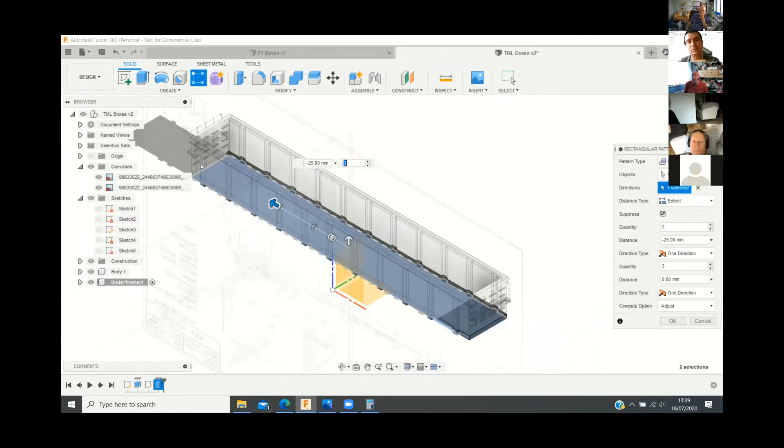Using the same pattern tool, I select the feature I just did, set the direction, and there's 1, 2, 3, 4, 5, 6, 7, 8, 9, 10, direction that way. Now you can see what's happened here - because I joined that triangular bit to the floor, it's now dragging the floor out, trying to copy it. So I'm going to cancel that, go back into the extrusion I did, edit it, and rather than telling it to join, I'll create a new body. Then when I go back into pattern, it will select just the triangular part of that feature. Select the direction.

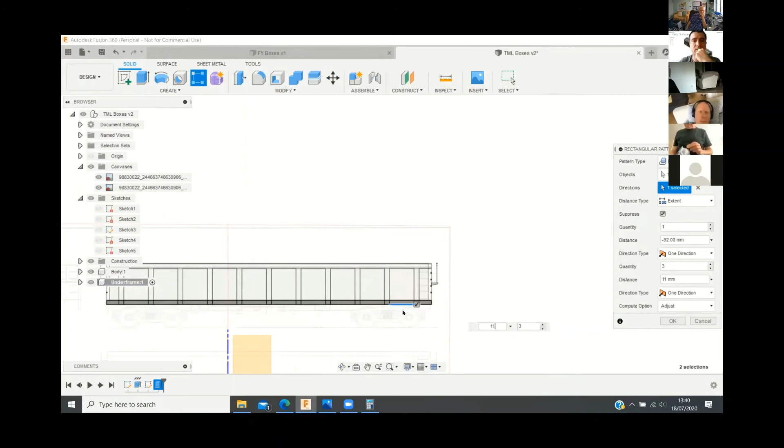In Fusion, do you have the option of working on layers as you do in traditional AutoCAD? Never used traditional AutoCAD, so I don't know. Okay, right. Layers are like think of it as a separate piece of paper if you were doing a drawing, and you can view layers or not, turning them on and off. The best way I could imagine that in Fusion would be the components rather than layers. Yeah.

I'm just going to restart that because that seems to be a bit weird. Redefine that direction.

Okay, they're all centered. So now I've got a pattern with all of those triangular bits added. The problem is, because I had to create them as separate bodies, I've now got a list of all these different individual bodies. You can turn them all on and off, which is great, but I need them all joined to the top one. So I'm combining, using the top one as my target body, selecting all the other ones, and telling it to join. They're now all added in on that side, and part of that body floor.

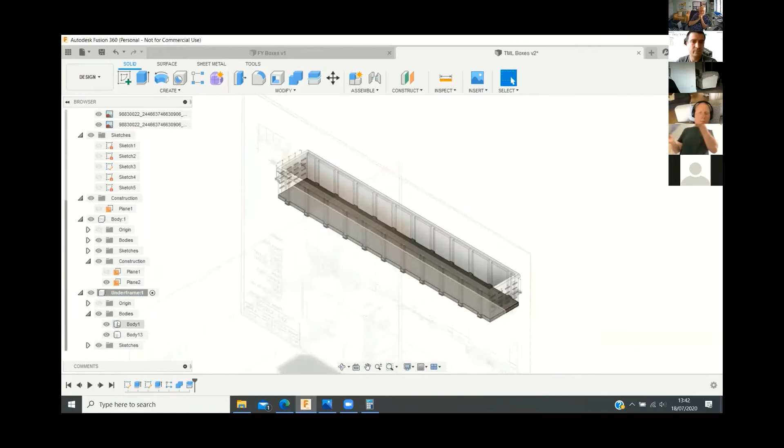I could draw these on the other side, but rather than doing that, I'll split this on plane 2 again. If I bring back that construction plane which I had on that one, then I can split the body, selecting the bottom body, splitting tool, that plane, and then hide the side that I don't want, mirror the side that I want to keep. It's now got all those supports on. Mirror plane, that side. So I've now got the extra bits around the bottom on both sides, and then combine that one, bring that back in.

Any questions there? Are you going to do the other one? There's another something similar to those at the bottom. What are they? The top edge. Yeah, yeah, that. And that's kind of also has a rail between all the way along, doesn't it? It does, yeah.

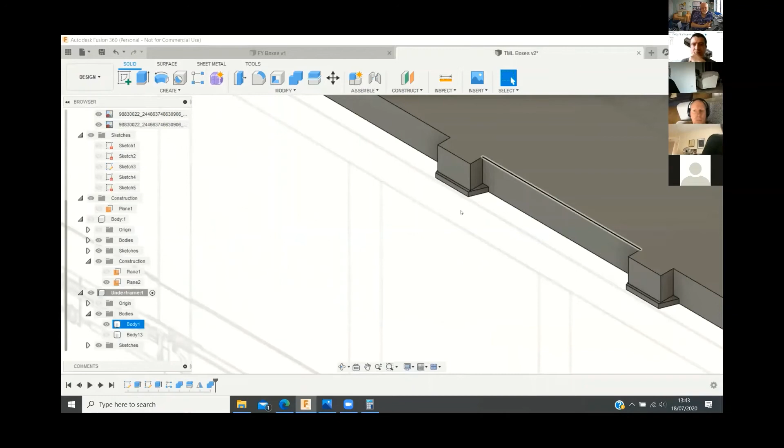So what I can do then is either go back in and draw them again on the top edge, hiding that top body, or you could cheat, which is a bit of a pain to do, and just drag those up and then delete them again in the middle. If I give you an example, come to this side, I can drag, extrude that back. If I go back for patterning, I could drag that up again there, and then delete the bit in the middle, which would probably be a pain in the backside to do, because you'd have to do them each individually.

So what I'd rather do is just draw them again. So in the timeline, I've gone back to before the patterning, do exactly the same, do a sketch on the top edge, and just draw that down again.

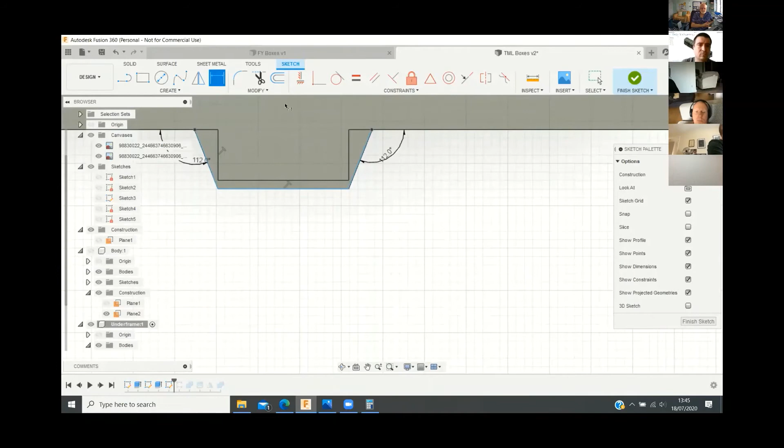Next, I'm going to show a coincident here, horizontal, vertical. What that does is allow me to put this point here in line with that one there, and the same on that side. So they're now exactly the same on both sides. Extrude that, come down 0.2 millimeters.

If I skip across, now you can see where I've drawn that one, all the patterns are still there for the rest. If I go back into pattern here, edit feature, I can then add at the top of the objects the one I've just drawn, and that will automatically drag them all the way across. So you can see how you can go back in your timeline to make a change, and it automatically changes the rest if you needed it to.

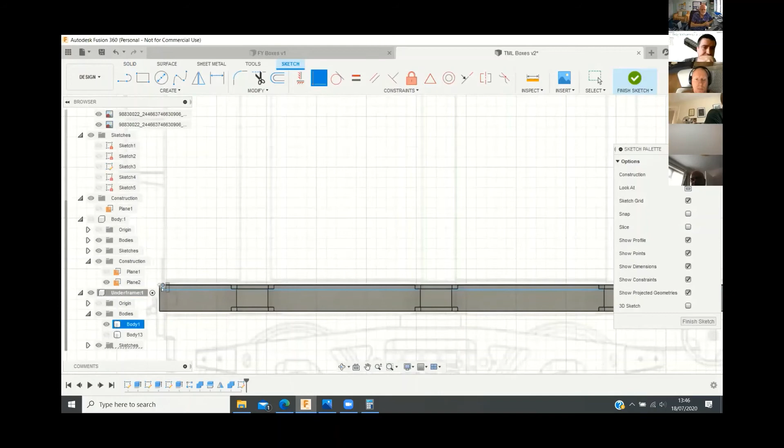And then, as Guy pointed out as well, there's also a rib that runs along here. That one's going to be a bit more complicated. I'm going to draw on that edge a rectangle going from there, drag it all the way across. And this corner here won't snap into the corner, so I'll leave it. Create a coincident from that corner to that one, define the height from there to there as the 0.2 top edges.

And then what I've got to do is extrude that out. Make sure it's not cut, I want it to join. So now I've got that top, that's it in that direction, that top rib there.

Any more questions at that point? No. Okay.

Probably the next thing I would draw in is the two, I would say buffer beams, but they've not got buffers, they're centers of buckeyes. So I'll just draw this headstock, is it? Yes.

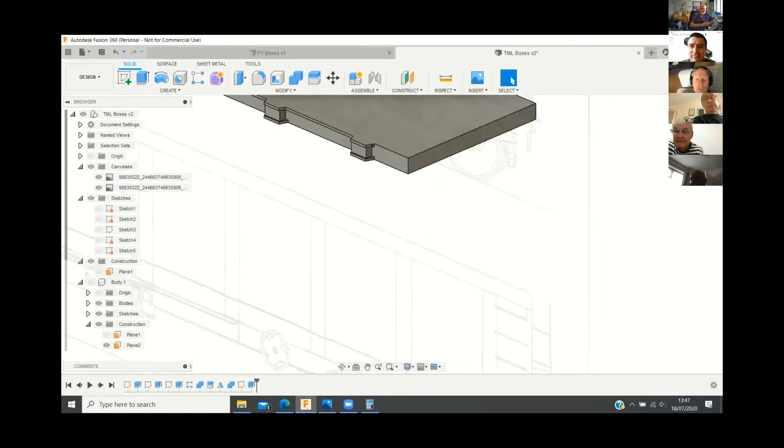Draw on that bottom edge. Foster Yeoman ones have got buffers, or some of them did. There was the outers as well. The outers on these, yeah. And there were ones which were just buffered at both ends as well.

Okay, so I'm going to extrude that down to match the drawing. So I could go back in the history, and I think what's happened is it's not selected that part correctly. I'm actually going to cheat a little bit, just crack that there, extrude it to the end. And I didn't draw it on this side either.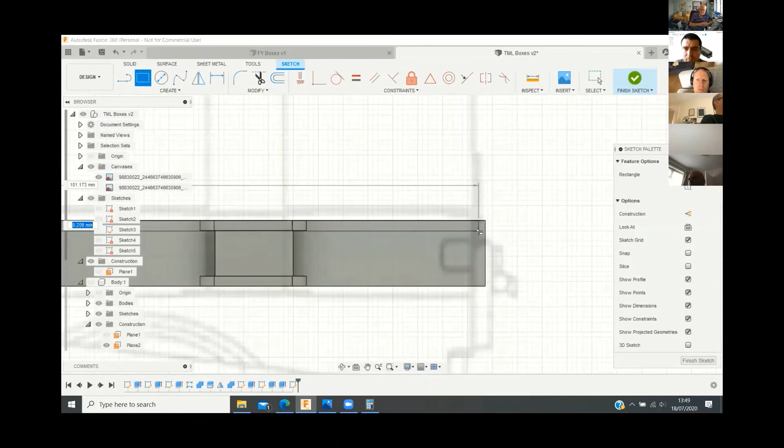So looking at this side, what's happened is when I selected the box the first time round, I hadn't selected this bit as well. So that's now added in.

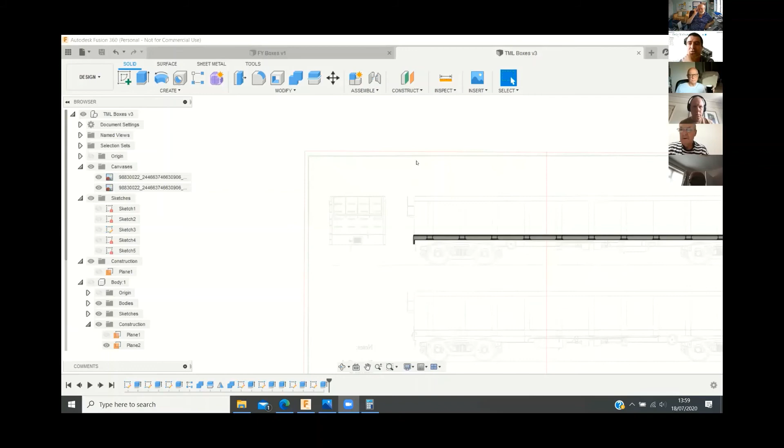And Carl, didn't you need to boost your computer as well? Yeah, realistically, I had only 4 gigabytes of RAM on our laptop, which was rubbish for the laptop in the first place, and it was a bit of a pig to run, especially when I went on to do something difficult like the tram. I've upped the RAM in the laptop to 16 gigabytes, which is why it runs relatively quickly no matter what I'm trying to get it to do.

Are you right, is it a PC Mac, or is it a PC laptop? Yeah, PC. Obviously, the RAM depends on, if you're using older operating systems, they won't recognise the high level of RAM, so depending on your machine, you might even need to upgrade the operating software. If you're running an operating system that has that problem, you're probably not going to be able to run the latest version of Fusion anyway. No, that's what I was thinking, because you need...

Are you saying you need 16 megabytes of RAM? Gigabytes. They state that you need 8 as their minimum. I was getting it to work before, but it was very slow. Have you got a video card in there as well? Nope. No. Well, as you see how long that took to load this - every time I would make a change on this, I was looking at 20 minutes to make one simple change.

There is another product that has lower memory usage that works in a mostly similar way, that I believe has similar licensing restrictions - you can use it free so long as you're not creating a product to sell, running a business, and that is Design Spark. Plenty of bits of software out there, it's just whatever you find works best for you.

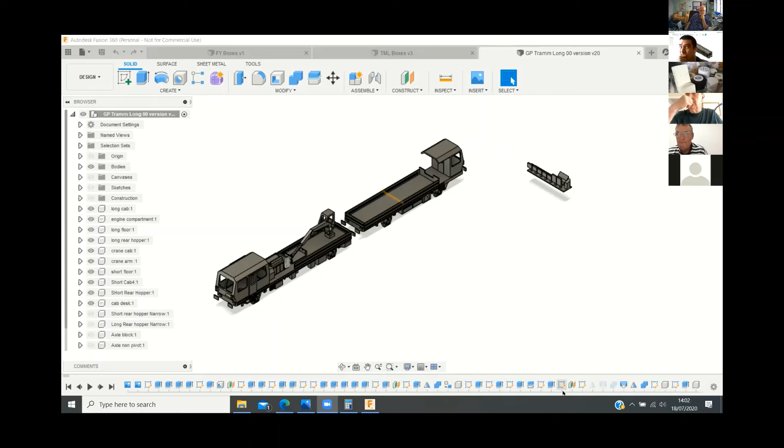Other than that, I'll pass the floor over to... Hi everyone. Having finished drawing off the TML boxes, I thought it'd be worthwhile now showing you what I do to transfer the files through to the slicing software, adding supports, and then transferring those files into the printer.

So the first thing I need to do is I'll show you that I've put in a couple of brace beams going across the wagon just to hold its shape while it's cured after printing. Hopefully that should stop it bowing outwards.

Okay, so what I'm going to do now is select File, 3D Print, select the upper body, and then save that into a TML folder, and then do the same by File, 3D Print, selecting the under frame, and adding that into the same folder.

And I'm going to come into my Anycubic Photon Slicer software. There's various different softwares you can use. Another quite popular one is Chitubox, but at the moment they've done an update on it and it's a bit buggy and sometimes crashes out. I'm just going to use this one instead.

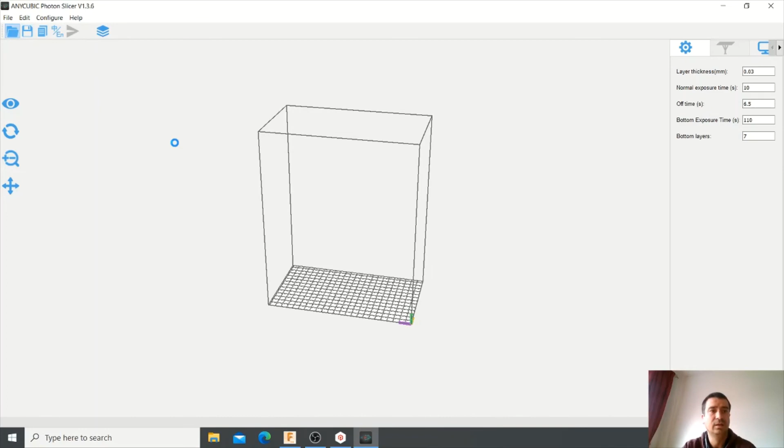I'm going to open up the folder that I was in and select the body to start with. That then adds the body in. I'm going to rotate it through on its axis. No, not that one.

You can see as I'm changing what it's doing to the file, it's moving it around within the print bed. As you see, I've now orientated it so it's flat to the bed and also runs along the length.

So what I'm then going to do is I've moved it to the side and then I'm going to add in the supports to go underneath. I'm going to add in medium supports, they give us the best strength. I'm going to rotate to come underneath, and start adding supports around the outside edges.

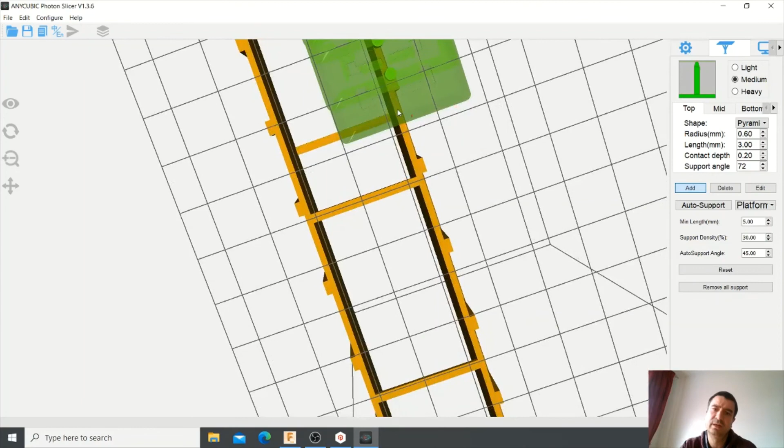I'm just placing these randomly around the model. The more supports you have, the more resin you use, obviously, but also the potential of more strength to the model as it prints. I'm printing this one flat to the bed so that I don't produce any islands when the printer starts to produce the handrail section. This should hopefully give me some reasonable supports with those areas.

This process can be quite slow, laborious, especially if you're doing quite complicated models. What you've got to try and do is support the model, but also make sure you're not producing any islands where the printer can't actually get to the model and it produces something that floats off in space.

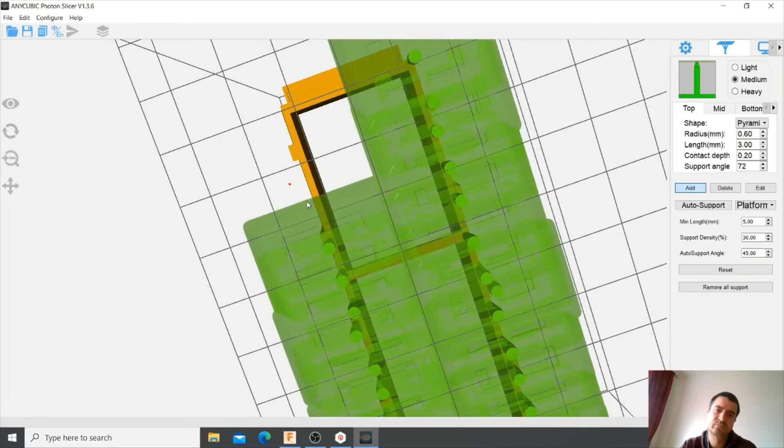Okay, so that's the outside of the bottom supported. I'm now going to go across those centre braces to give them a bit of support as they print, including the upper one as well.

Okay, so now you can see how the support's now all underneath the wagon. I'm bracing it so that it prints, and I'm also then going to add in some supports to the bottom of the railings. Obviously, wherever the supports connect to, when it prints, you're then going to also get slight dimples and imperfections.

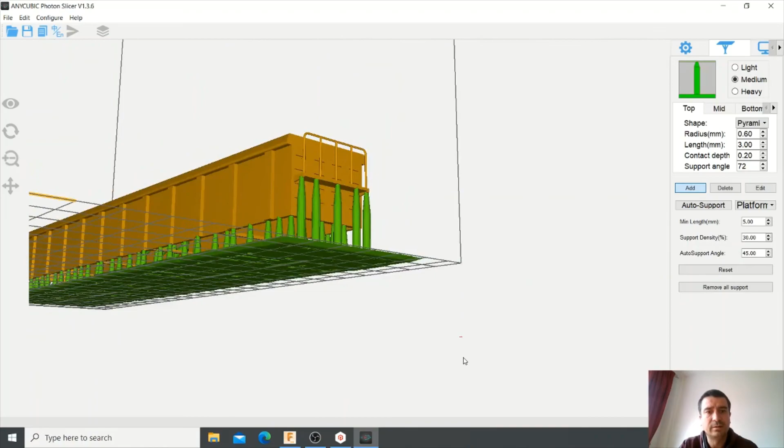These are easily cleaned up with just a file afterwards. Okay, so that's that hopper supported all the way around, just checking to make sure there's no connecting bits that you don't want to damage the model. Looks good. So the next thing I'm going to do is I'm also going to add in the underframe, which can print at the same time.

Where's it gone? Right, let's try again. So, underframe.

Okay, again, going to rotate that through 90 degrees. Move it out of the way slightly. And I'm going to print this face down so that the supports are all on the inside of the hopper. So rotate that through 180 degrees, so it's now upside down.

What I'm also going to do is put a bit of an angle on this one. I'm going to go for maybe probably too much, 10 degrees. Ooh.

The reason I'm putting an angle on here is so that when it prints, I don't end up with a large flat section flat to the print bed, because that will cause suction effects and potentially peeling forces that will cause the print to offset, so you don't get a nice smooth finish.

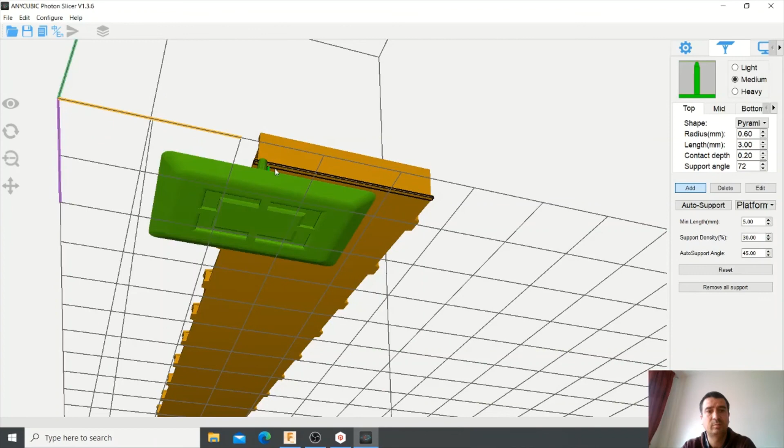So again, I'm going to go underneath the model and add in supports. Because it's an angle, I need to make sure I get the first set of supports right up against the lower edge, so they're on the lowest point and there's no island there. Then same as before, I'm going along the model adding those in. You can see I'm not doing them all exactly in a straight line, so they're offset slightly, giving the printer a bit of a smoother floor to print on. That's down one side, now going to do the next side.

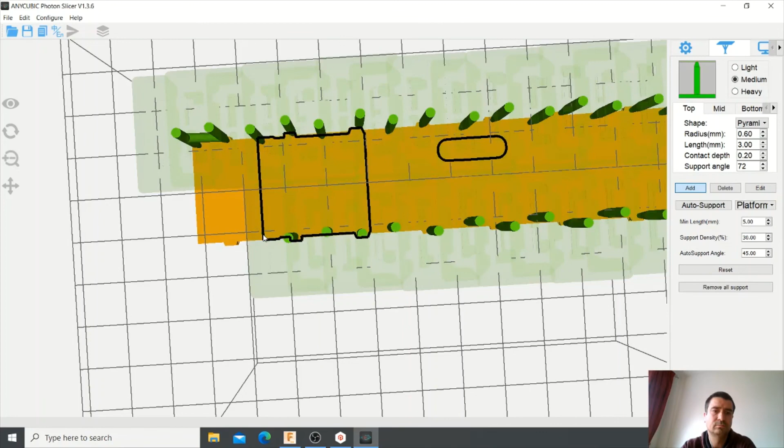I'm going to do the same by just going randomly across the middle, adding these supports in. What I'm looking to do is try to have every bit supported so that as it prints, it's got something to key to. As I rotate, you can see I've now got a green floor that completely covers the bottom of the model, so it should all be supported there.

Come back out of that part. I've then got the two models within the software. So the next thing I'm going to do is slice the print file. What this does is create a file that the printer can actually read. Each slice or layer is what the printer will print at a time.

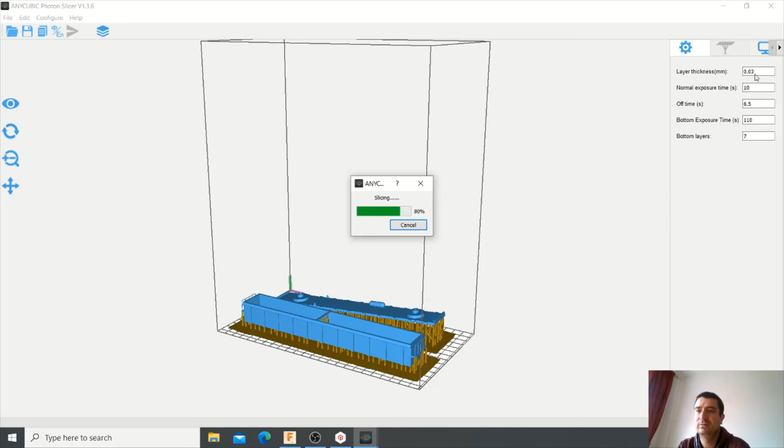As you can see here, it's telling me this print will take approximately 2.5 hours. That's now created the file.

The next thing we're going to do is open up Photon File Validator. This checks the file to make sure I've got no islands that are floating, and that it's sliced correctly with no erroneous bits sticking out. So I'm going to open up the TML boxes file. This loads in, and you can see it's going to run through every single layer. There are 520 layers, and basically all it's doing is going through each layer looking to make sure there's no islands that are unsupported.

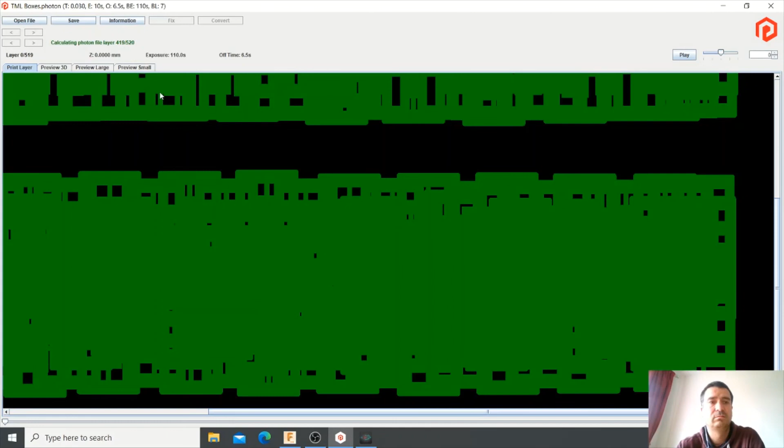This is relatively quick with 520 layers, won't take too long, 30 seconds at most. The next thing it will do is tell me if this file's okay, which it's not, because it says an unsupported island found in layer 482. If I go to fix, it says 287 pixels. So I'm going to click on start. It says nothing can be done.

So what I can then do is go and look at the file and find the unsupported section. What I'm actually going to do is cheat a little bit here. I could go back in and add some supports, but instead I'm just going to draw them in, connecting the unsupported bit to a supported bit. The reason I'm doing it this way is that on the next layer, this part's already connected, so I'm not going to lose anything by doing this. It also means I don't have to add in extra supports.